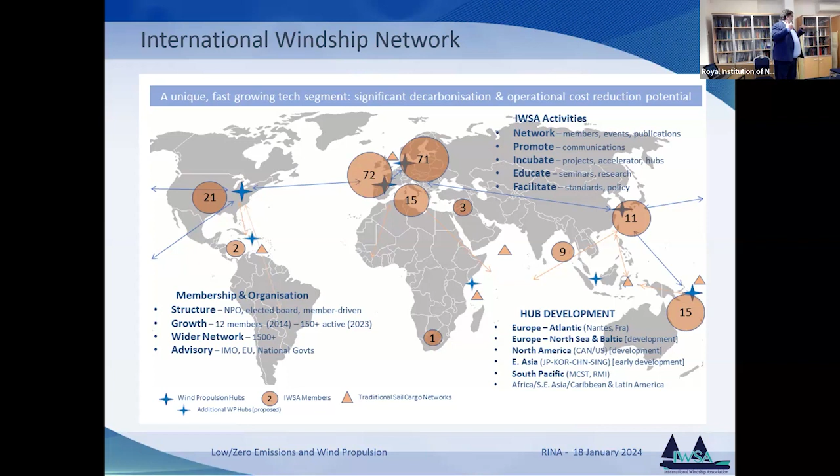But yeah, we're actually over 150, probably more like 200 now, active members, and we have a much bigger network as well, probably a couple of thousand that receive our newsletter and also interact with us. That is an organic membership. We've never gone out and actually recruited members. So it's very organic, and there are actually many ship owners who are not members that are interacting with our membership.

So I'm going to talk about wind propulsion and how that's fitting into the policy structure, if you like, or the targets that we've got first of all. Then I'm going to move on to some examples of where clusters of development are happening, and also we'll look at the market, where it is at the moment, the forecast going forward. We're going to round that out with some trends and developments, and also some barriers and drivers, which we didn't get to last time I was here. We did a forum back in September. We discussed some of these. We'll have a little bit more of a discussion on this.

But yeah, so the IMO, I think you're all pretty aware of what happened in July, MEPC 80. We had some indicative checkpoints, targets. That's the way I look at it. You put a number on something, that's a target. It doesn't matter what you call it, it's a target. So 2030, 20% striving for 30% from a baseline of 2008, 2040, 70% striving for 80%, and then 2050, the net goal. I always find nets are very leaky. I don't like net zero, zero emissions. That's what we're aiming at, and that's what we provide. Wind propulsion is providing not just zero emissions GHG, zero emissions, period.

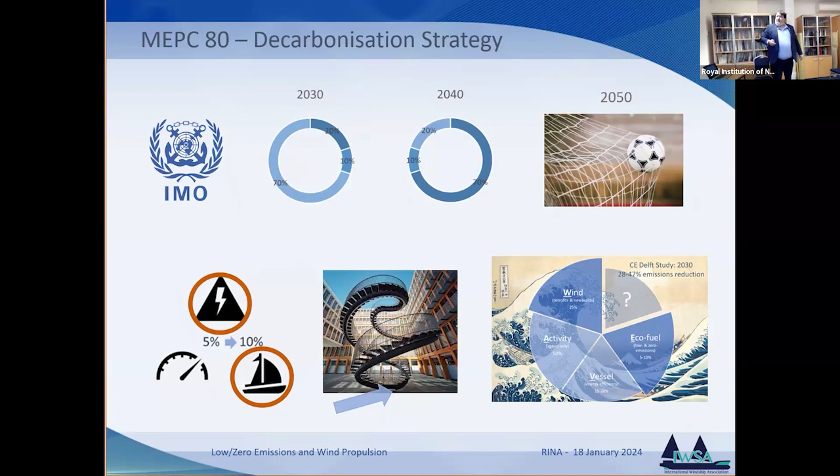And that would only increase the cost of shipping between 6 and 14%, which is within the bunker variation levels. So this is absolutely doable, but we've got to pull our finger out and get moving on it. So I'm not going to go through that. That's for your information later. I'll give you the PDF. But that just basically explains what I've just been talking about.

So direct application of wind power. Okay. I still have to explain this to people in the industry. It's unbelievable. The wind is used to move the ship directly, not all the way through the process. So the top process, wind is delivered to the turbine, all the way through to the power coming out of the propeller. You're losing 9 units out of 10 of that power. So 90% of that power is lost. You deliver that to a ship.

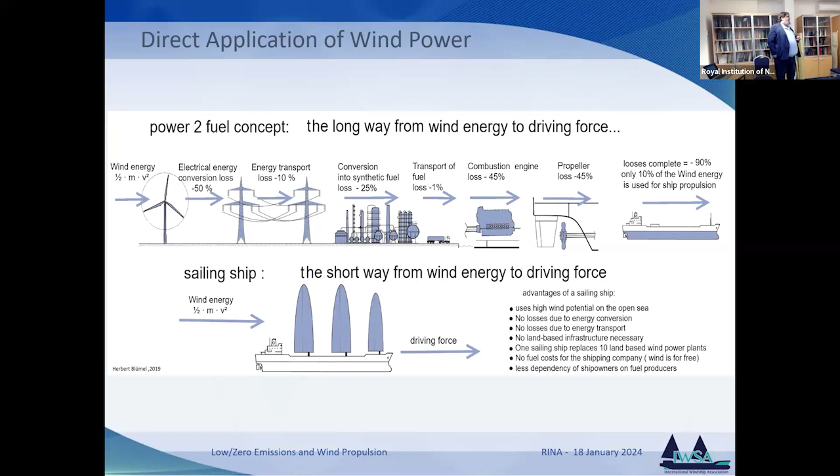Okay, we can have an argument about how much is translated into propulsion, but basically you're getting 100%. Yeah, it's moving the ship with the wind. And if it doesn't move the ship fast enough, well, then we get into a business discussion. But we move ships. Now, something I put into the abstract.

I want to just talk about some. Those things are pretty clear. Yeah, it's a zero emissions energy source delivered directly to the ship without having to mine it, refine it, transport it, bunker it, or store it on the ship. So all of that infrastructure is not required. But there are also some co-benefits that we don't often talk about.

One of those, which is rising up the policy framework, if you like, is underwater radiated noise. Now, of course, if you're delivering wind to a vessel, you can maintain speeds, reduce the power going through your propeller. So you can actually move it from the cavitation area into the no cavitation, for example.

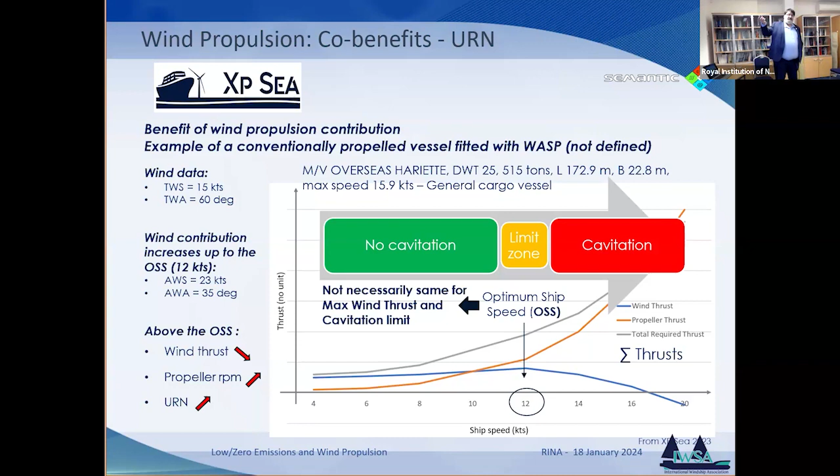Now, this was a study done by one of our members, and they actually looked at a couple of simulations. One was 100% conventional propeller propulsion, the other one was 60% conventional, 40% wind propulsion. Now, we don't call that primary wind, but it's close. This is a major wind-propelled vessel. And one of those is potentially the Canopée, which you'll see a picture of in a moment, which is installed with an Ayro system, and that's transporting rocket parts from France to French Guiana at the moment.

Now, the decibel, actually you can't see at the bottom there, but that's okay. The decibel level basically reduces by about 14 decibels. Now this is, I think, selected, yes, the 100 hertz level. 100 hertz level has major disruption to fauna in the ocean. Now, most people think, oh, underwater radiated noise, that's affecting whales, large mammals, but it also affects phytoplankton.

Now, when they are stressed, they don't create their shells. They don't sequester the CO2, the carbon, and that causes another climate impact. So it's not a greenhouse gas, but it has a climate impact. We're not sequestering as much carbon in the oceans as we should do, partly because of the underwater radiated noise.

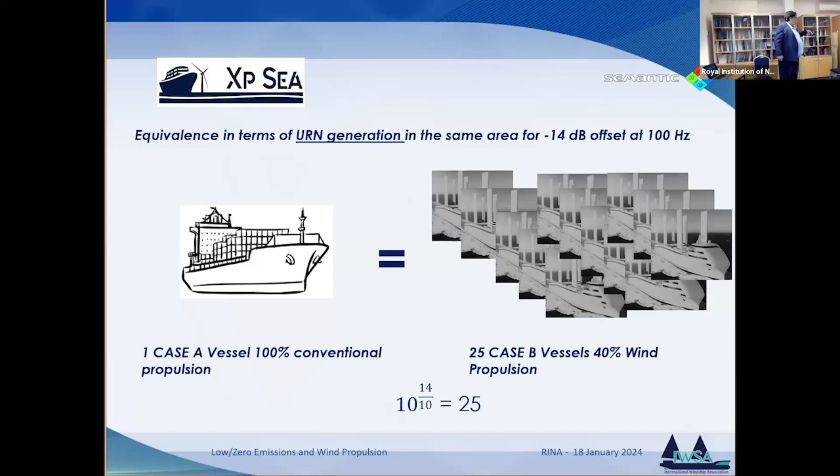Virtually no study has been done. There's very, very little around wind compared to propeller stuff. But there's some other considerations. I'll just quickly go through this. The middle one is very important for IMO with the MPAs. So there's an attempt to create 30% of the world's oceans as marine protected areas.

Now, you won't be able to go through those marine protected areas or close to them with high-speed vessels of any kind because of the underwater radiated noise in the future. At the moment, that's not a problem because we don't have the regulation. But this will actually mean that you would have the option to go silent or near silent by going fully wind around those areas when you're going across whale migration routes, etc. This is becoming a bigger and bigger issue in the IMO.

Range extension. Just as an example, there are very, very concentrated areas of activity. You know, the Malacca Straits, the Red Sea, as we're seeing, which is not very congested at the moment. I can't imagine why. The English Channel, for example. These are choke points. These are incredibly noisy areas. So if you've got a wind system on board, you've actually got almost unlimited range, but you've certainly got a range extension. So going around the Cape, for example, is possible to do at a much reduced cost if you've got wind propulsion on the vessel.

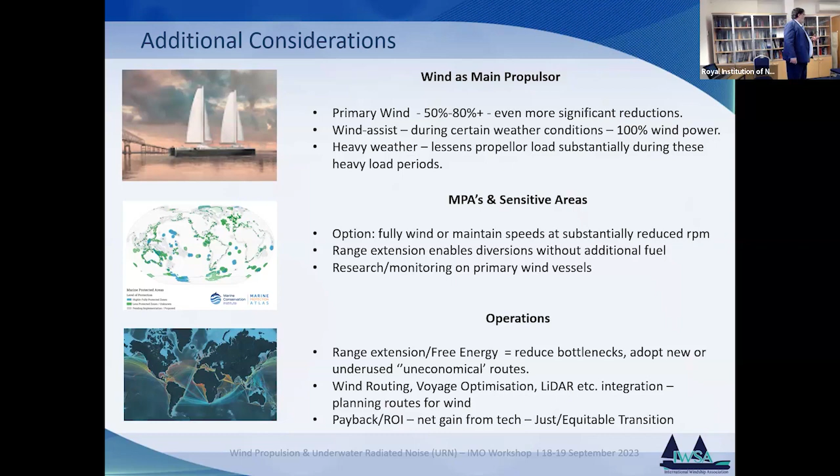Now, okay, so I talked about one of the co-benefits there, and there's always discussions and dissent on those things. But I'll just talk about the market forecast and policy pressure. 2023 was a busy one. Now, we did a survey in June, and what we asked policymakers, ship owners, stakeholders. This is just the result of the stakeholders, and sorry, it's a bit small. I forgot how small this was. But what it's very simply saying here is all of the fuels usually are surveyed.

And actually, I've checked with most of the surveys that have gone on with an energy mix where the ship owner is allowed 5 options. They say that methanol will be in the energy mix in 2030. So will biofuels. So will HFO. You only have 5 options to choose from.

Okay. Now, wind is almost never put into this, so we put it in. And what we got was wind assist by 2030. So wind assist is sort of 10, 20, possibly up to 30% of your power derived from wind. That's a wind assist, yeah? You're helping your engine. That was significant for 2030. It was pretty much at the same levels as HFO or methanol, saying that will be a major part of the energy mix in 2030.

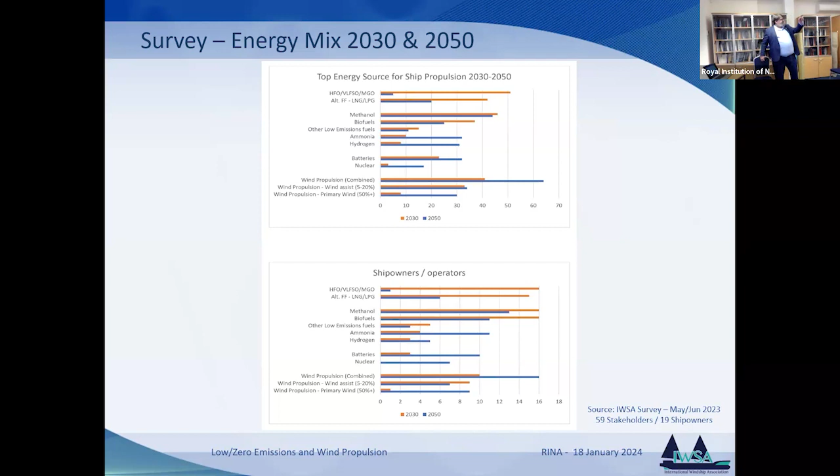Now, a lot of the industry still says, oh, but wind, that's an energy efficiency measure, isn't it? No, it's not. An energy efficiency measure cannot move a ship. Air lubrication is an energy efficiency measure. It reduces the energy. Wind moves ships. Now, you might only get 1 or 2 knots. You want to get up to 12 knots or 15 knots? Well, that's a commercial decision or possibly a safety decision. It still moves the ship. It's an energy force. And this was the same across all of the segments that we surveyed: policymakers, ship operators, ship owners, and other maritime stakeholders.

Now, where are we at the moment? Well, actually today, we have 33 large commercial vessels in operation with wind propulsion on them. That is about 2 million deadweight tons of ship. That sounds a lot, but it's not, as you know. It's still 0.001%, something like that. But we're basically where LNG was, if you take the tankers out, after about 7 or 8 years of development. Okay, so we're making progress.

But also there are 11 wind-ready vessels and another 16 in the pipeline for delivery in the next couple of months. So we estimated a doubling from last year, which was 23, by the end of 2023, or the first couple of months of 2024, just because of logistics issues, etc. We're pretty much hitting that.

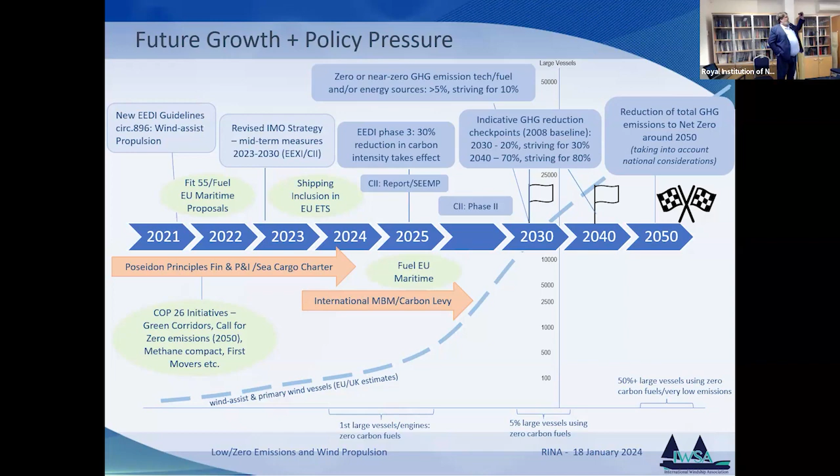Now, do we all like CII? Let's have a show of hands. Are we CII supporters here? That's a surprise. There are problems, there are issues, there are challenges here. But the overriding issue is pressure, and it's upward pressure, price pressure, regulatory pressure.

And this was a thought exercise that I did, and we can't see the bottom bit, but I'll explain what it is. This was a thought piece that I did back in 2021. It basically said, if we had wind propulsion on every ship mandated by 2030, we could deliver around a 20% reduction with a bit of voyage optimization. Okay, that's pretty conservative actually, but we'll go through it. The fuel cost that would save, and this is slightly updated with new numbers for the cost of fuel, would deliver about 1.3 trillion in savings by 2050.

UMAS and UCL estimate between 1.4 to 1.9 trillion for the total decarbonisation of shipping. Now, remember, if you're using wind, you're using 20% less fuel, potentially less infrastructure, maybe less storage on board. So you're actually reducing that total cost as well. So in effect, wind propulsion put on every ship by 2030 could deliver and pay for decarbonisation of the entire industry. So we can have it for free. Not quite, you know that.

And you can always challenge me on that, please do. That'll be a fun discussion.

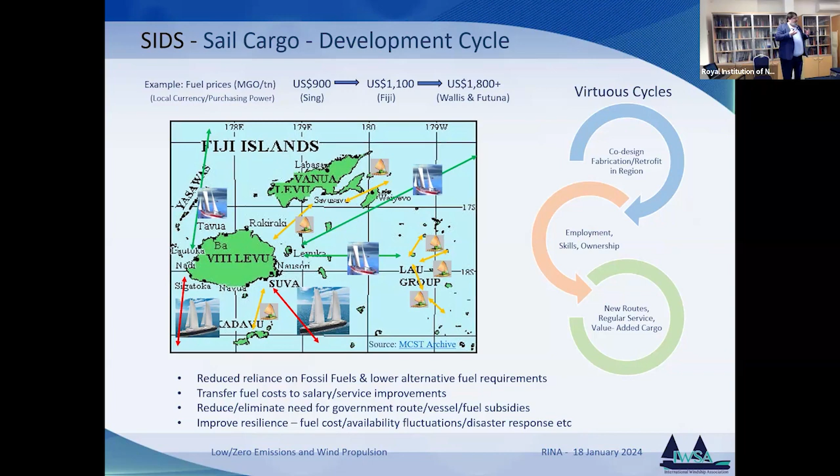We're not interested. And we talked to them for about another half an hour, and we found out that their calculation was with the 84% subsidy that the government was going to give us. So they thought we were only taking 10,000, but we hadn't included that subsidy. So with the subsidy, we were making a huge profit. So one of the problems is the whole economic cycle is under a huge weight of fossil fuel and the cost of fossil fuel.

Chinese yards now, so I'm not going to go through all of the details of these ships, but the yards now are starting to understand what wind propulsion is. They're starting to add wind systems onto their standard lists. So my father-in-law used to be in shipbuilding. He said, "Oh, it's great when somebody comes in and says, we'd like something special on the boat." Zero on the end of the cost.

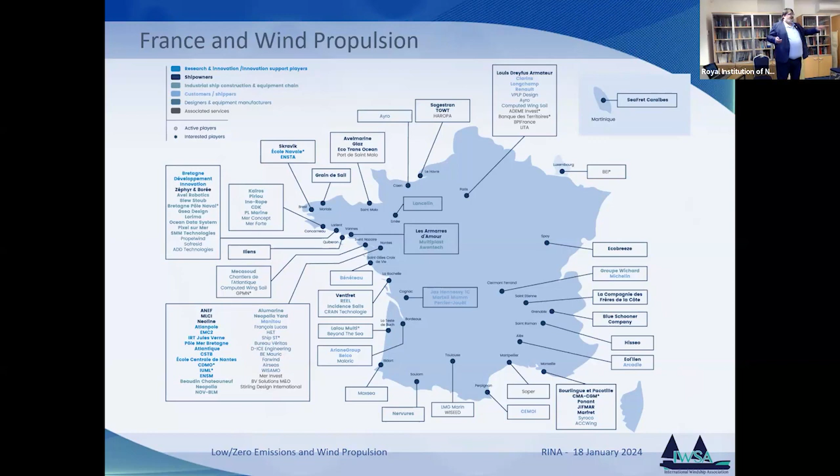Vaisala is actually one of the leading developers of LiDAR. And LiDAR's interesting because you can actually map the wind coming into the ship and adjust your system. So if you've got big systems, which can really generate a lot of lift, a LiDAR system, which is expensive at the moment, could be a good option to really optimize those, get another couple of % out of that. Be able to retract the mast if a large squall is coming in, or depower it in advance.

So all of these systems, all of these developments are coming along. Weather routing for wind, very sophisticated now. Yeah, the software is out there. We can weather route, and I was just talking with Greg actually about, you know, machine learning AI.

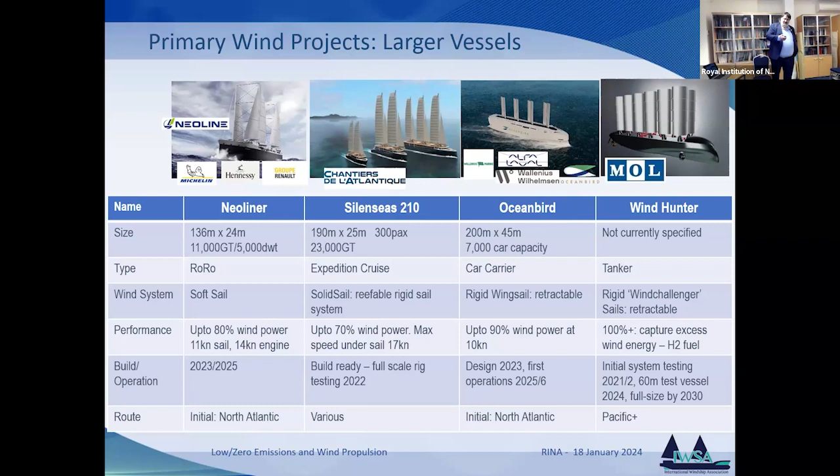Okay, so it's fantastic, yeah? The future's wind. You're all convinced, a few of you sitting there going, no, I'm not convinced. Okay, well, this bit is probably the bit you'll like better. What are the problems that we still have? And there are problems, of course there are.

Within 3 to 5 years for a retrofit, quite possibly, it will pay for itself. So you've got free energy for the rest of the vessel's life. And not just that, you can take the system off and put it on another ship after the ship is broken, if it's an older ship.

Operational, yes, okay, well, the ports. Many of our members are spending a lot of time with port operators discussing how the operation for stevedoring is going on for bulkers. A lot of dust is generated by a bulker, quite often. So how does that interact with the system? But all of this is being looked at, fed in, first iteration, second iteration, third iteration.

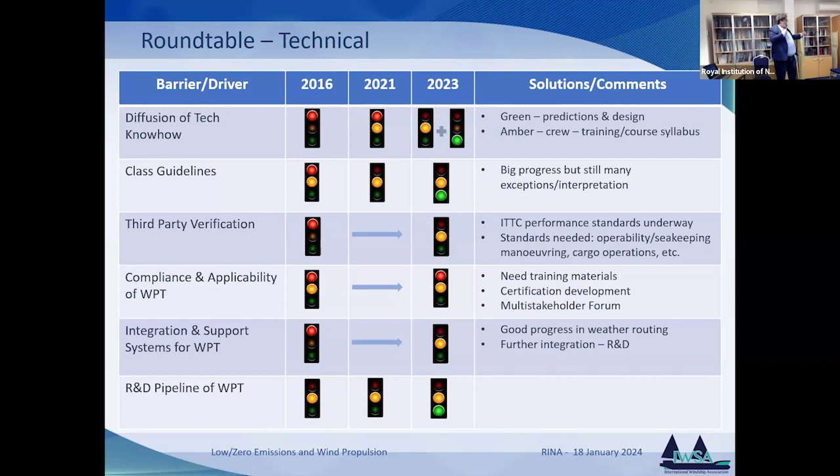So solutions are there. Now moving on to the policy regulation, I've talked already quite a lot about this. We are doing better. We've got a strategy for decarbonising shipping. Is wind included in all the regulations? No. Why? Because all the regulations were written for fuel-powered ships. Fossil fuel-powered ships. All of those regulations, just as we're having to rewrite the guidelines to allow ammonia or hydrogen or methanol.

All of this stuff is underway. It's all got to be reconfigured, but wind is different. Yeah, wind is special. I like it. But all of this regulatory framework has to be revisited to ensure that it's a level playing field, and that takes time. But we're getting there. The principles are already there. We just got to develop that a little bit further.

Fuel prices, I can't do anything about that. Although I was in a meeting with a large oil producing country, and I said, well, bunker prices, there's nothing we can do about that. The transport minister leans in and says maybe we can do something about it. I thought it was very nice.

Skepticism and perception. This is still quite a big issue. I still get the occasional person from the industry saying, oh, you're the guy that doesn't want to have engines in. Where did that come from? And these are people that have been in the industry for 20, 30 years. But there's still a perception around wind. It's a little bit like nuclear. If somebody says nuclear, some people go, oh, great, the future. Other people, dangerous, don't want that, Chernobyl. That's a big perception problem they've got.

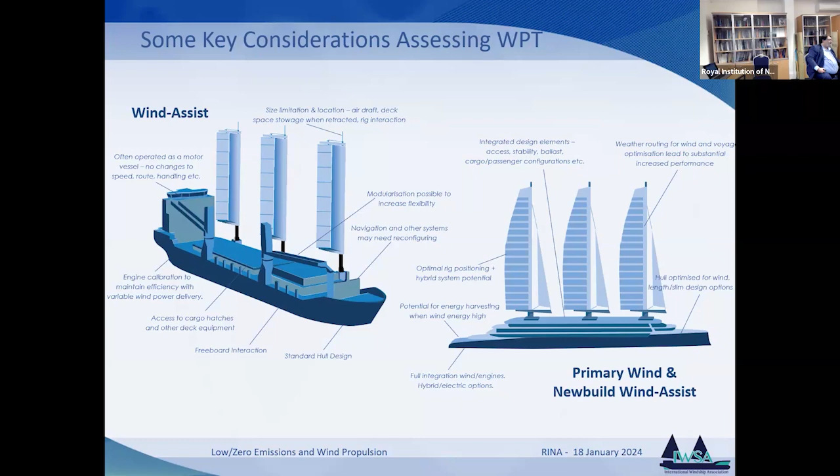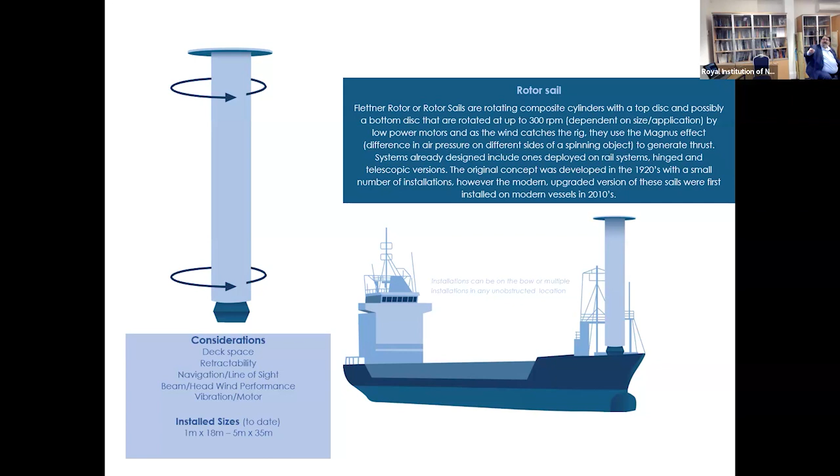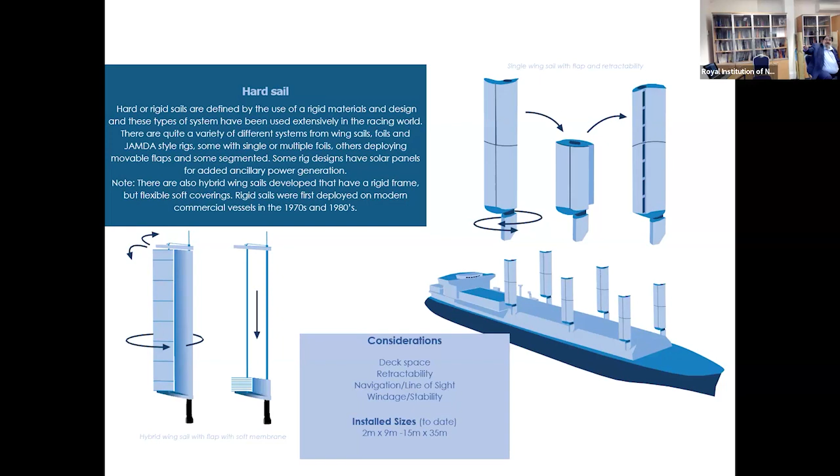Soft sails and hybrid sails, there are all kinds of sails. Actually, the one behind the bar there is one developed by Michelin, and it's inflatable, so it looks like a Michelin man that's crossing the road and being flattened. But we've got all different kinds of sails there.

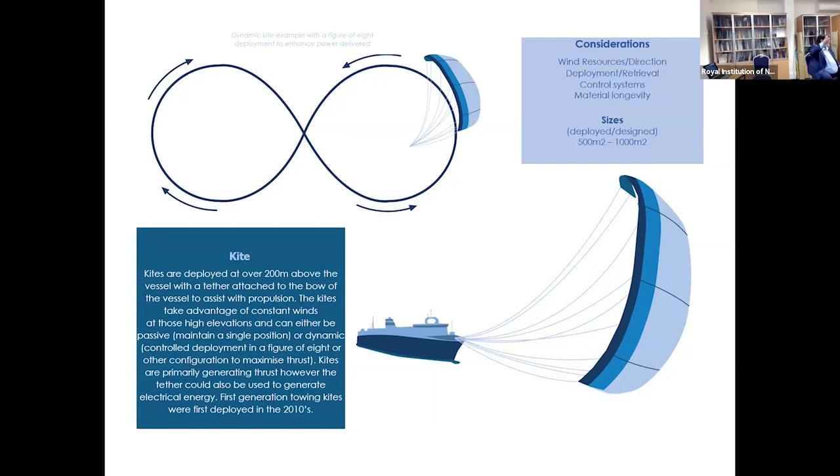Kites, these are either passive kites or figure-of-8 kites. And one of the leading developers is Airseas, which is a spin-off of Airbus. And they're bringing all of their aeronautical engineering ideas, pretty much like a drone. It operates like a drone at about 300 meters, where the wind is blowing all the time, 99.9%. And then we've got a couple of others. These are the last two.

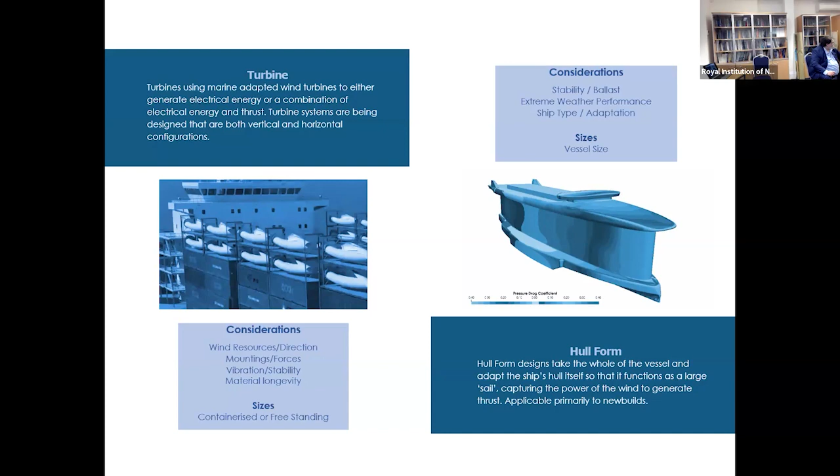You were talking about aircraft wings. A lot of those now have gone to glass fibre technology. How resistant would that be in a maritime environment? Because they're designed for high altitude where it's comparatively dry and non-salty, and now we're kind of covering them with salt. Absolutely. The Silent Seas one with the solid sail, that's fiberglass.

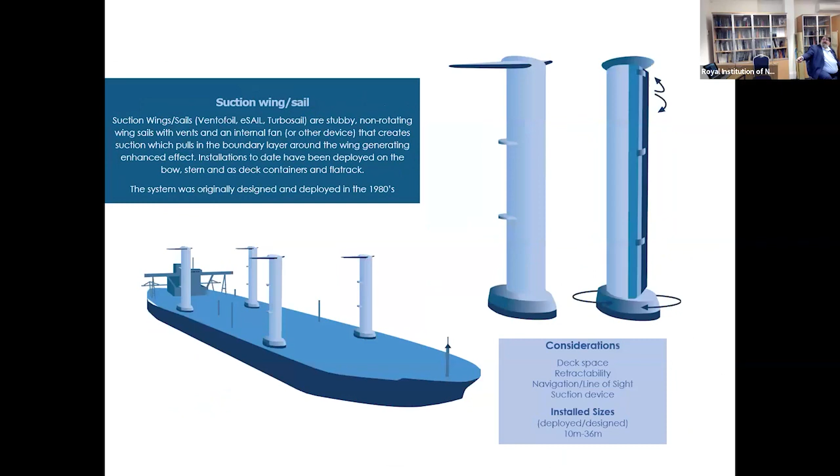A lot of the systems are a form of fiberglass. I'm not sure all of them are using this, but I can't remember the acronym for it. Extensive testing. I'll just show you the one that's probably undergone more testing than any other, which is the MOL system. Yes, this one, the Wind Challenger. This system is actually retractable. It's about 30 meters plus.

Well, I've been to the test site. They've had one of these on test since 2016. And these have been through, right on the coast, typhoons, everything. So they've tested pretty much everything. Now, obviously, they're testing in a pure marine environment, but the materials have been very resistant and been developed. So there is a lot of material science going on. I know Greg's project has some really interesting ways they're forming and reforming the pieces.

But there's one other thing I will add to that, and it's the recyclability as well. It's the circularity of this. Now, I sit on the World Wind Energy Association board, and we're starting to see the recyclability of turbine blades, which are actually pretty similar to this. You know, you're talking about something that will last about 20, 25 years in a maritime environment. So we are learning from them, and the recyclability is getting better now.

So you're going to see lots of reports of landfills full of early wind turbine blades because they were built without that circularity in mind. The ones now are pretty much 100% recyclable. And it's not the technology to do it, it's actually the cost. And they've now found ways to do it with reasonable cost as well. So yeah, that circularity. So it's the materials, but also creating materials that we can actually reuse and recycle at the end of the day.

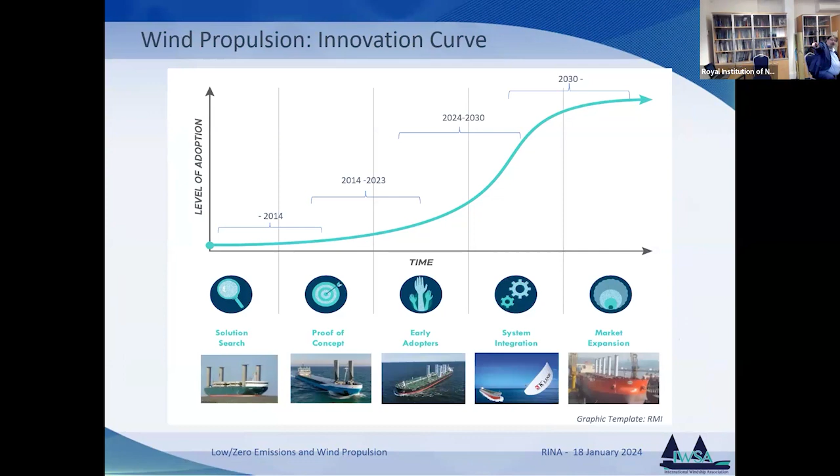So yes, there's 2 things. One, you're a ship owner, I want to get your business. Do you believe me when I tell you? No, of course you don't. Unless you're an idiot, you're not going to believe me. So I will probably give you the better performance figures because I want to impress you. Now, from an association point of view, we actually try to temper that right down. It's much better to under promise and over deliver.

Now, the third party assessments, almost all of the ones that I'm seeing now, are pretty well aligned. The modeling has got much better, and the performance of these systems is getting better. We're understanding the systems better. The design is getting better. The materials are getting better. And the cost is starting to come down because of improvements in design application. So it might be cheaper, better performing, so a better ROI for you as well. But yes, I would say that they are aligning better. However, I do on occasion hear someone saying, we'll give you 30% on a bulker.